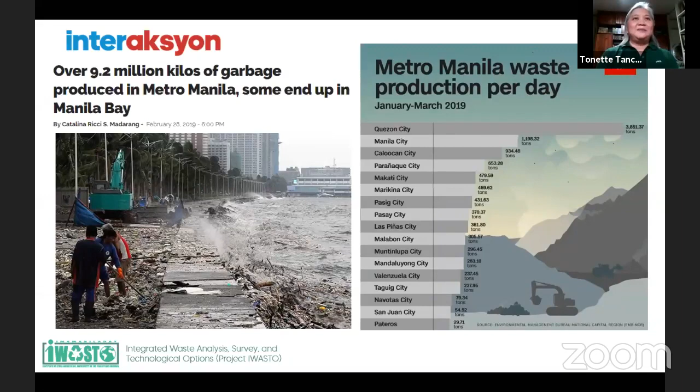Kung kailangan talaga nating gamitin, mag-reuse. And then pwede din namang mag-recover, yung may mga let's say nutrients sa mga nabubulok na bagay, sa biodegradable component, pwede nating ma-recover ang nutrients at pwede pang magamit, instead na tinatapon na lang.

Pwede ring mag-recycle, and then yung sa disposal part na is thermal treatment with energy recovery, for example incineration. And then final, kung wala na talagang ibang mapupuntahan, o para sa mga residual waste na wala nang mapapaggamitan, yun lang sana ang napupunta sa landfill.

Ang training natin ngayon ay tungkol sa paano natin mare-recover ang nutrients sa biodegradable component, na yun yung ipapaliwanag ng ating mga trainers maya-maya.

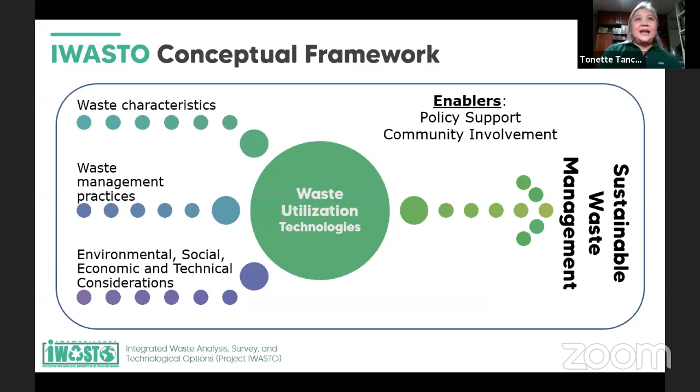Yung objectives, hindi ko babasahin literally lahat, pero ang target area namin, because this is for the rehabilitation of Manila Bay, yung part ng watershed dito sa Manila Bay watershed, specifically mga Pasig, Navotas, Malabon, Marilao, Malinta, Obando. Pero of course, kapag nag-training kami ganito, we invite everyone kasi applicable naman ito sa lahat, at sana mag-benefit din, marami namang lugar na pwede pa itong magamit.

Kailangan nating malaman yung to evaluate waste management practices, at ma-utilize ang to recommend appropriate waste utilization technologies, at mapag-aralan ano-ano bang facilities ang available, like may MRF ba, nasaan sila, anong mga material ang kinukuha nila, kasi malaking bagay din ito para mag-guide ang mga tao kung saan magdadala ng kanilang mga basura na hindi naman kailangang itapon, baka may pwede pang paggamitan.

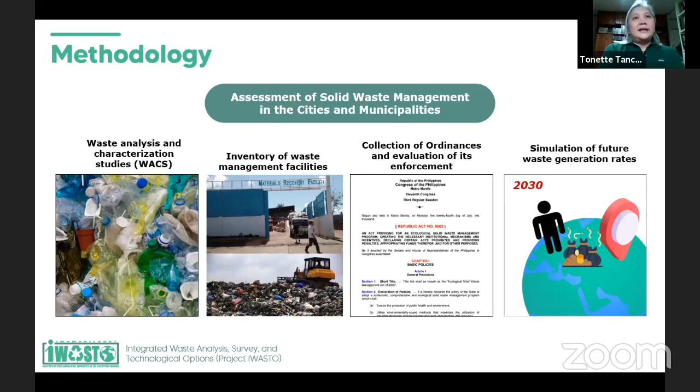Setting up the appropriate waste utilization technology - we are still looking for a partner right now because of the pandemic, we can't go out much. But we'd really like to be contacting and networking with LGUs who are willing to have these technologies in their community, even on a very small scale, smaller than barangay level. We would like to use the technologies already developed by ITDI and DOST, and set them up in the community.

So that's why we're doing this training. Aside from sharing the technology and knowledge about it, another purpose mentioned by Roda earlier is to find interested partners. Right now we haven't established one yet, hopefully somewhere in Manila, discharging to Manila Bay, part of the Manila Bay watershed.

We'd also like to systematize our waste data that is being collected and have it available to the public. I think this is important, so the general public knows what's happening, the data about waste. And finally, policy recommendations so the technology can be used, and of course contributing to sustainable solid waste management.

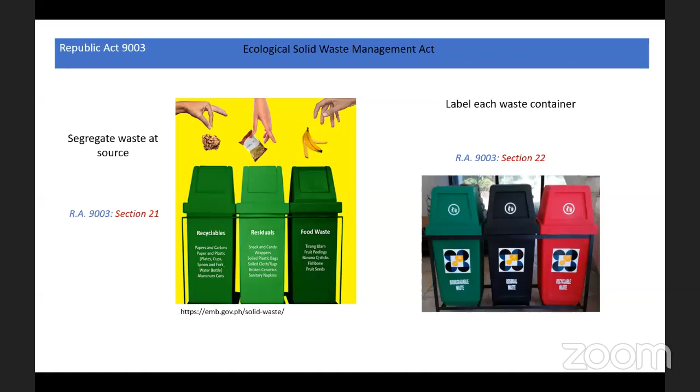There are four major waste categories. One is biodegradable, which should be processed into compost. Recyclable waste, which are normally collected in junk shops and recycling facilities. Special waste, which should be collected by accredited treatment plants. And residual waste, which should go to landfill.

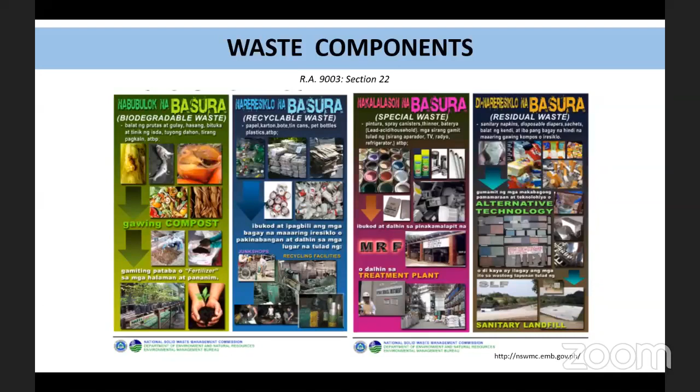If we are going to look at the waste characterization data, we can see that the Philippine solid waste is largely composed of biodegradable waste. So this has great potential for composting.

So here in ITDI, we develop various composting technologies to manage this biodegradable waste. One is the bioreactor composting technology, which can be used by local government units and establishments generating large volume of waste.

We also have the dual drum composter, which can be used by barangays, schools, universities, canteens, small farms, and institutions generating small amount of waste. And the other one, we have the household tumbling composter, which was basically designed for home composting. Allow me to give you the details of these composting technologies using our technology videos.

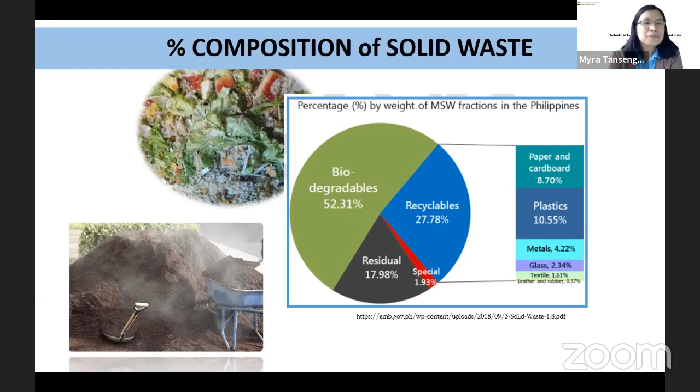Greetings from the Industrial Technology Development Institute, Department of Science and Technology. This presentation will provide information on the ITDI-DOST Bioreactor composting technology as an option for LGU to use in converting organic wastes into compost.

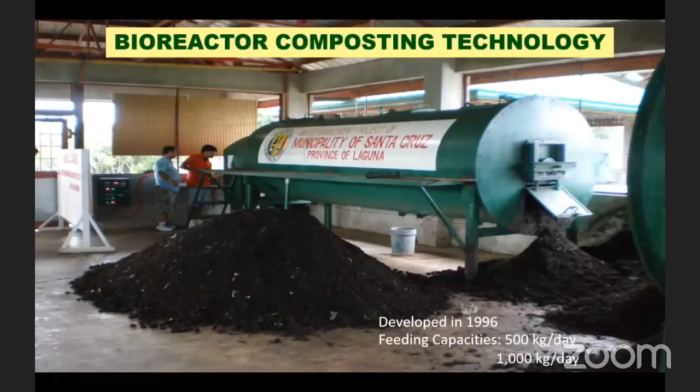The bioreactor composting technology was developed in 1996, with the aim to provide an alternative technology for management of municipal solid waste, specifically for the organic fraction of solid waste. The feeding capacities of the bioreactor are 500 kg per day or 1000 kg per day.

Through the paddle, materials slowly move into the opposite end where raw compost is discharged. The harvested raw composts are then transferred to the curing area for further degradation and maturation. Here is the composting process using the bioreactor technology.

First is material or feedstock preparation, where shredding of organic waste, weighing, and mixing of materials are done. Next is the in-vessel composting using the bioreactor. The composting operation using the bioreactor is continuous, meaning daily feeding of organic waste and daily unloading of raw compost.

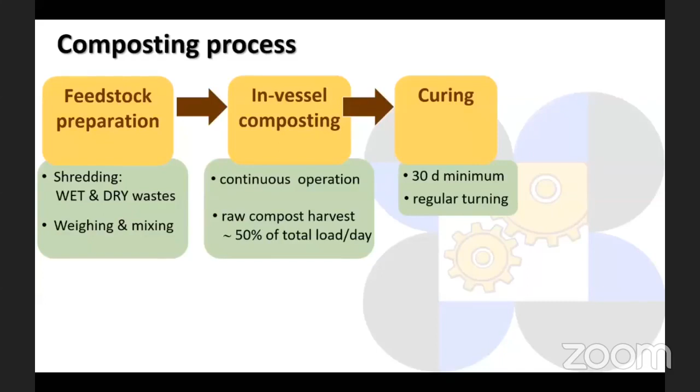Raw compost harvest is about 50% of the total load. This raw compost is then transferred to the curing area for further degradation and maturation for a minimum of 30 days. Curing piles should be regularly turned and temperature is also monitored. Finally, mature composts are then sieved and packed.

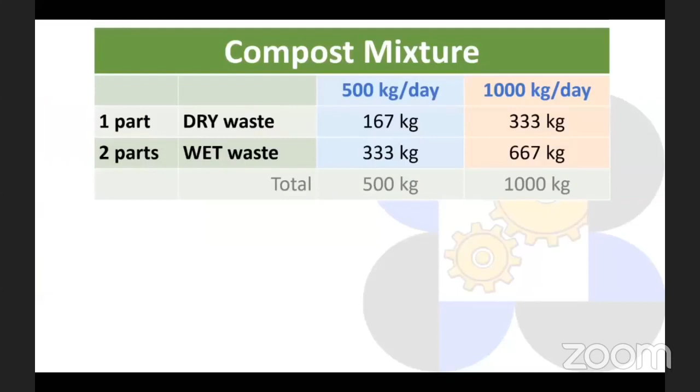Here's the recommended proportion of organic materials for composting: 1 part dry waste and 2 parts wet waste. Dry wastes or the browns serve as carbon source needed by decomposers or the microorganisms responsible for decomposition of organic wastes, while wet wastes or the greens serve as nitrogen source for decomposers. These materials are both needed for optimum composting activity.

So, for a 500 kg per day bioreactor capacity, you need a daily loading of about 170 kg of dry waste and about 330 kg of wet organic wastes. For a 1 ton per day capacity bioreactor, you will need a daily input of about 330 kg of dry wastes and about 670 kg of wet waste.

You can try this proportion initially, but you can also try 1:1, or 1 part dry waste and 1 part wet waste, depending on the type of waste materials you have.

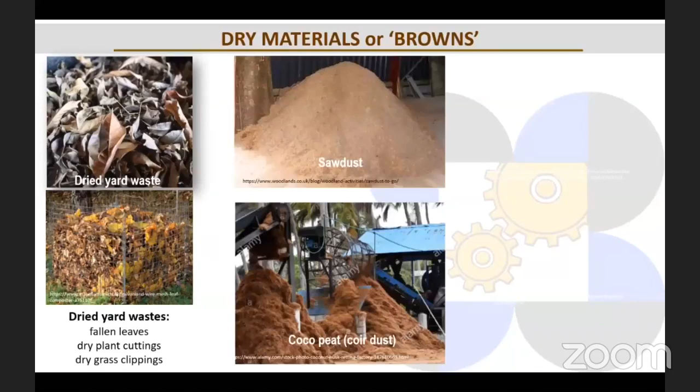Here are examples of dry materials or browns: dried yard waste such as fallen leaves, dry plant cuttings, or dry grass clippings, sawdust, coco peat or coir dust, and agricultural wastes such as rice straw, sugarcane bagasse, corn cobs, etc.

Wet wastes or greens include kitchen waste such as vegetable scraps, fruit peelings, and leftover food, market waste such as vegetable scraps, and food processing wastes. You can also use fresh garden wastes, as well as fresh agricultural or farm waste as wet wastes.

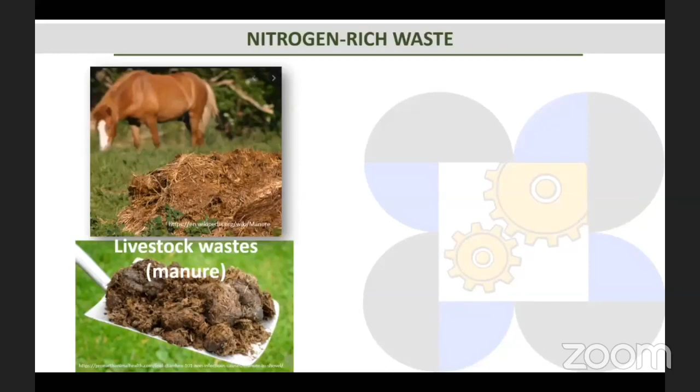If available, nitrogen-rich sources can be added in the wet materials. Nitrogen-rich wastes include livestock waste such as manure from poultry, piggery, horse, and dairy farms. This should be added in moderation in the composting mixture, about 10% of the total mixture is recommended if available. Also high in nitrogen level are fish wastes, and green materials such as fresh grass clippings, legumes cuttings, weeds, etc.

Composting materials, that is, wet and dry wastes, should be shredded prior to loading into the composting unit. Small particle size of waste materials will allow faster decomposition during composting.

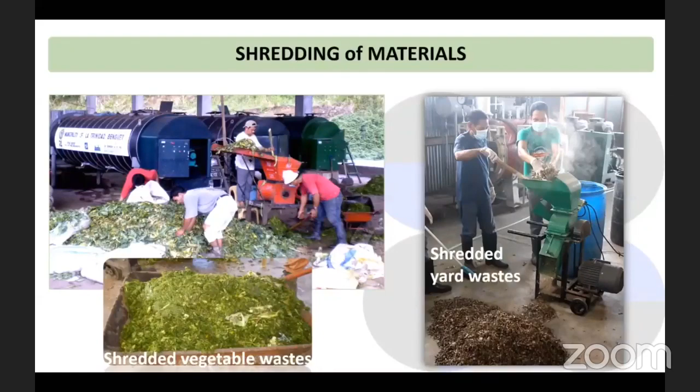Once all the raw materials for composting are prepared, weigh and mix the shredded wet and dry wastes. The moisture content of the initial mixture should be 50 to 60%. This is considered to achieve the optimum moisture content for compost decomposers.

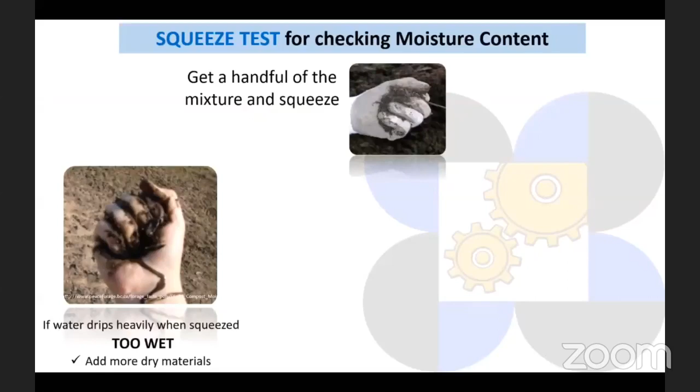Moisture content of the initial mixture can be determined through a simple method called squeeze test. First, get a handful of the mixture, then squeeze. If while squeezing, water drips heavily, it means your mixture is too wet, or the moisture content is more than 60%. You can resolve this by adding more dry materials to your mixture.

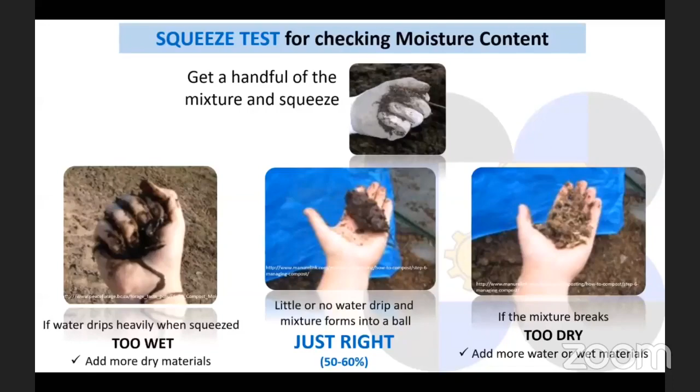If little amount to almost no water drips when you squeeze, open your hand. If the mixture in your hand forms or clumps into a ball and retains that shape, then the moisture content is just right—you have achieved 50 to 60% moisture content. However, if the mixture crumbles or breaks when you open your hand, it means the mixture is too dry. Add more water or wet materials to the mixture until you achieve the right moisture level.

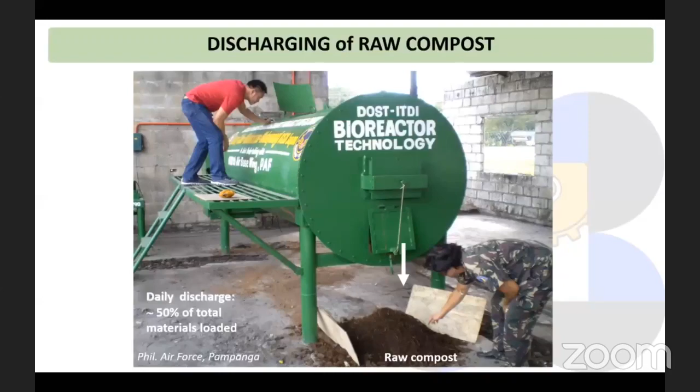After preparing the right mix, the materials are then loaded into the bioreactor at the top feed port. Loading is staggered to avoid choking the unit. Raw compost is slowly discharged at the opposite end port. In one day, you can harvest about 50% of the total materials loaded.

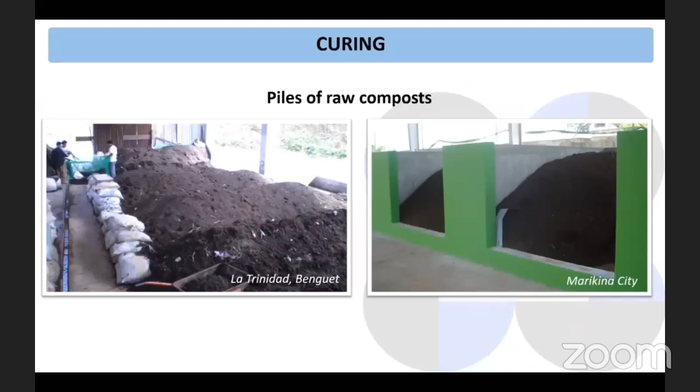Harvested raw composts are transferred to the curing area. Remaining organic matter are further degraded during the curing phase, therefore an increase in temperature can be observed during curing due to microbial activity. Regular turning of piles, and monitoring of temperature and moisture should be done during the curing stage.

After the curing stage, the final product is then sieved and packed. Label the compost and store in a dry, covered area. Compost is mature and ready for use when the temperature in the pile has dropped to 33 to 35 degrees centigrade, or approximately ambient temperature.

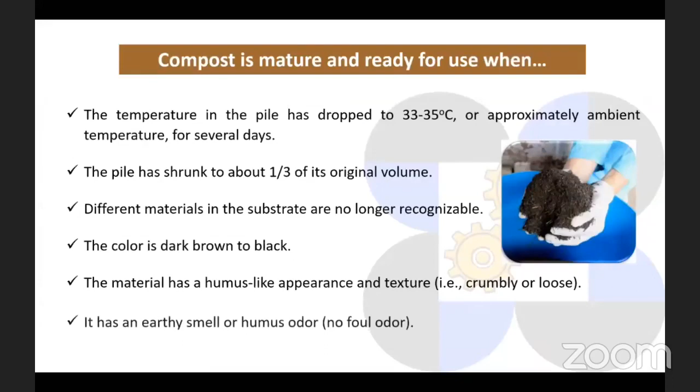The pile has shrunk to about 1/3 of its original volume. Different materials in the substrate or mixture are no longer recognizable. The color is dark brown to black. The material has a humus-like appearance and texture—it should be crumbly or loose. It has an earthy smell or humus odor, and it should have no foul odor.

The composting product may be applied in ornamental plants, backyard gardening, landscaping and greening programs. Take note that the quality of compost products depends on the materials used and observance of critical parameters of the composting process. It should undergo appropriate testing and analysis before it can be used for plants intended for consumption.

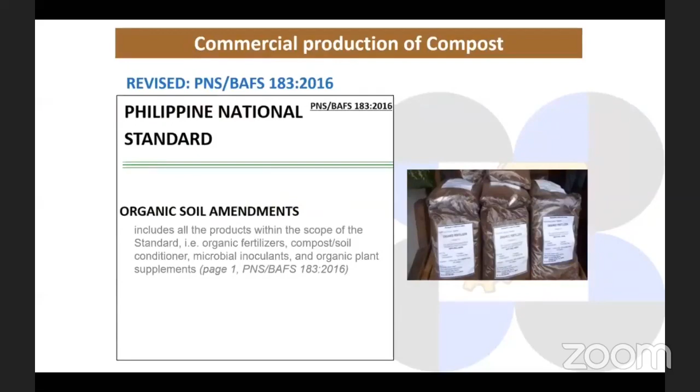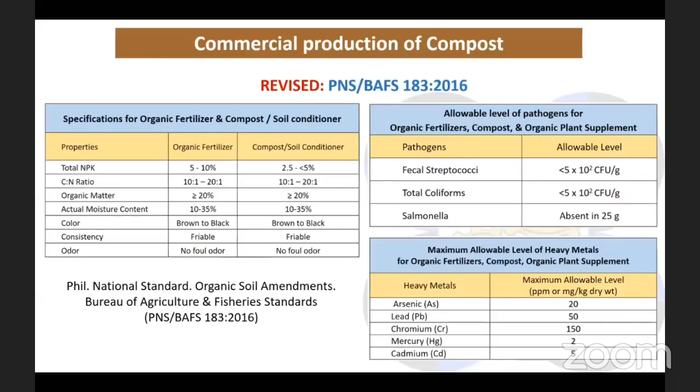For commercial production of compost, please check the Philippine National Standards for Organic Soil Amendments. This PNS on soil amendments shows that compost for commercial production should be analyzed for basic property parameters, pathogens, and heavy metals, and the product should meet the allowable levels. The PNS for organic soil amendments can be downloaded online.

Here are the needed materials during composting operation that you can consider in budget planning. Aside from the composting machine, you will also need a shredder, common garden tools and supplies, and very importantly, PPE or personal protective equipment. You will also need documentation supplies and personal hygiene supplies.

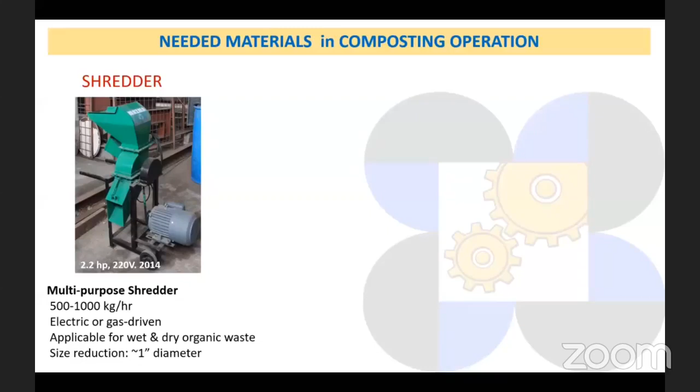A mechanized shredder is needed to cut the waste materials into smaller pieces to help hasten the composting process. A multi-purpose shredder applicable for wet and dry organic wastes is recommended. A mechanical or digital weighing scale can be used for weighing the waste materials to be processed for composting. A dial thermometer is used in composting to monitor the temperature of the mixture or pile. Here are other needed materials and supplies.

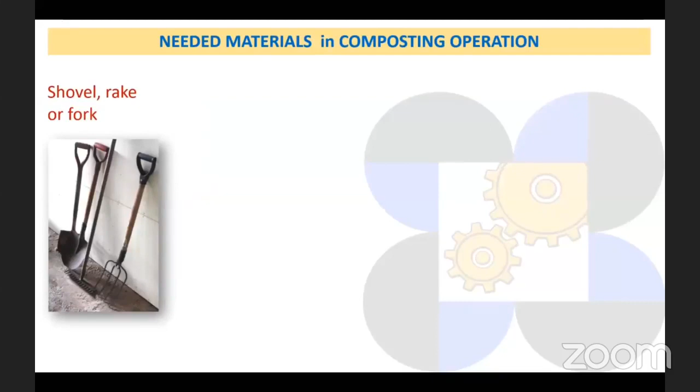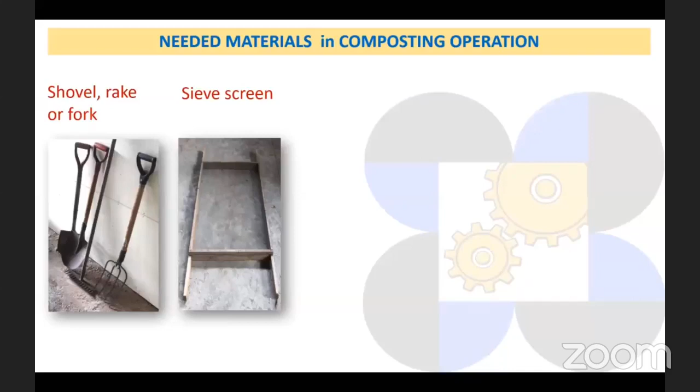A shovel, rake or fork will be used for mixing initial composting materials, and for turning the compost pile during the curing stage. A compost sieve is used for sifting out big, undecomposed particles from the final product before packing and storage. Pails or drum containers are used for waste collection and storage.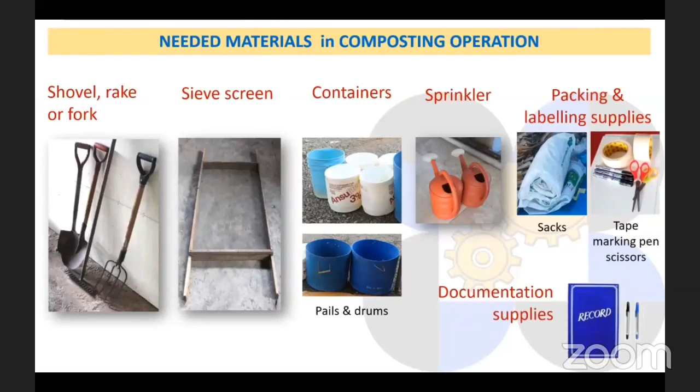Water sprinklers are used for applying water into the mixture or pile to maintain appropriate moisture content. Sacks are used for storing the final product, along with labeling supplies such as tape, scissors, and marking pen. Documentation supplies such as a record book and pen are used for recording all details of composting activities.

Personal protective equipment, or PPEs, needed during composting operation include gloves, masks, goggles and boots, to minimize exposure to potential health and safety hazards. Workers should also wear proper working clothes, that is, long sleeves and long pants, or alternatively, a working shirt with arm cloth in place of long sleeves.

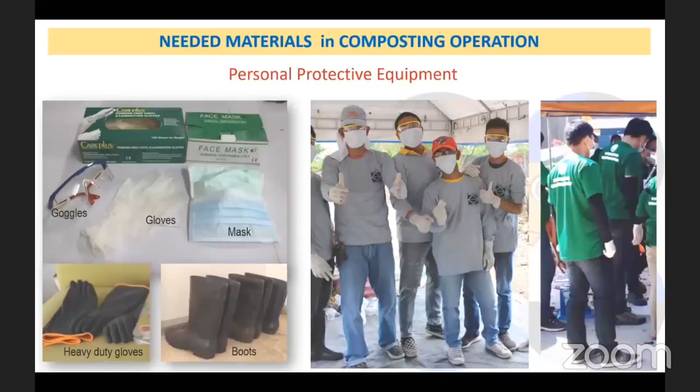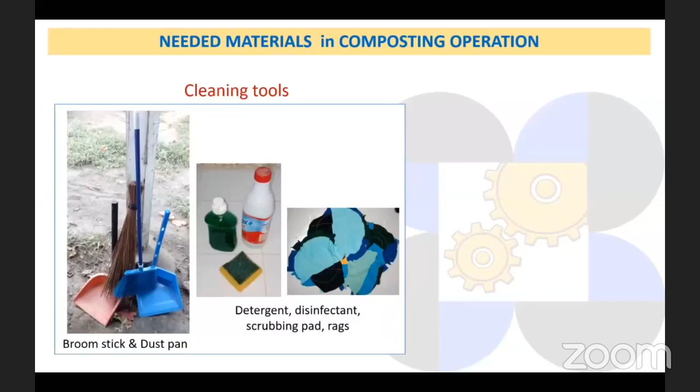Cleaning tools are needed for regular cleaning and maintenance of the composting facility and used tools and materials, to keep the composting tools and area clean. This may include broomstick and dustpan, rags, detergent, disinfectant, and scrubbing pad. Finally, personal hygiene supplies such as soap, tissue and alcohol should be available for the workers.

When choosing a location and setting up the composting facility, here are a few important considerations. The composting facility should be located away from residential areas. The distance from human settlements and source of drinking water or wells from the composting area shall not be within 5 meters. The composting facility for a bioreactor unit should have at least 120 square meters, with enough space for workers to move around during composting operation.

The area should be secured and covered to protect the equipment and tools, preferably with concrete floor and not prone to flooding. There must also be electric and water supply in the facility. The bioreactor requires a 220-volt outlet. For manpower, at least 2 to 3 workers can be designated to operate the bioreactor composting technology.

Here is a recommended layout for the composting facility. The process flow should be carefully considered, from the entry point of waste materials up to the storage of the end product, for better workflow and personnel movement within the area. The facility should have the following parts: a material or feedstock preparation area, where shredding, weighing and mixing of organic wastes is done.

An in-vessel composting area, where the composting unit is loaded with the prepared biodegradable wastes. A curing area, where the harvested raw compost is piled for further degradation and maturation. A screening and packing area, where the mature compost is sieved and packed, and finally, the product storage and exhibit area. In addition, a washing area should be put in place for water supply and regular cleaning.

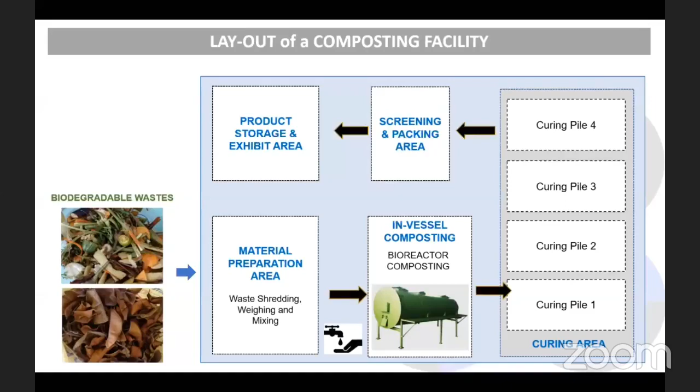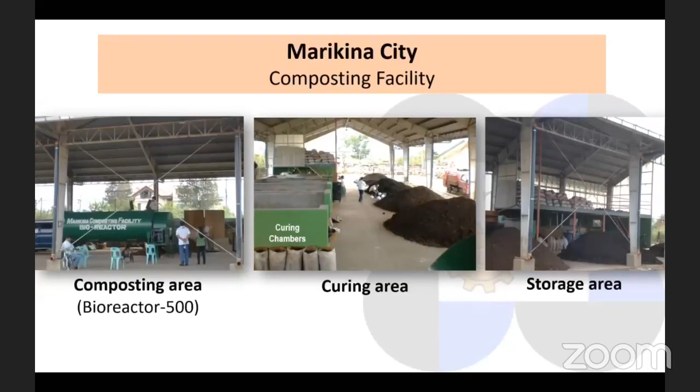Here is the composting facility in Marikina City. Shown here are their composting area with a 500 kg per day capacity bioreactor, the curing area with cubicles and ordinary piles, and the storage area.

Here's the list of bioreactor adopters nationwide. As of January 2020, we have a total of 121 adopters, the majority of which are local government units. Some adopters are food processing industries and private farms.

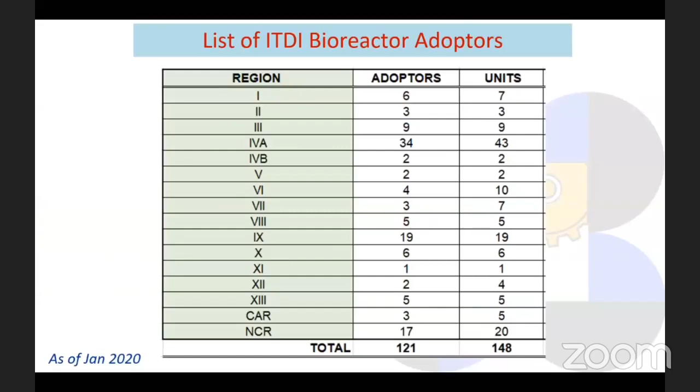We have 4 licensed accredited fabricators of bioreactor composting technology: Lamaco in Bacoor, Cavite; Mariñas Technologies Incorporated in Pila, Laguna; Pimentel Creative Builders and General Services in Zamboanga del Sur; and Bestmark Agro-Industrial Enterprises in Santa Barbara, Pangasinan.

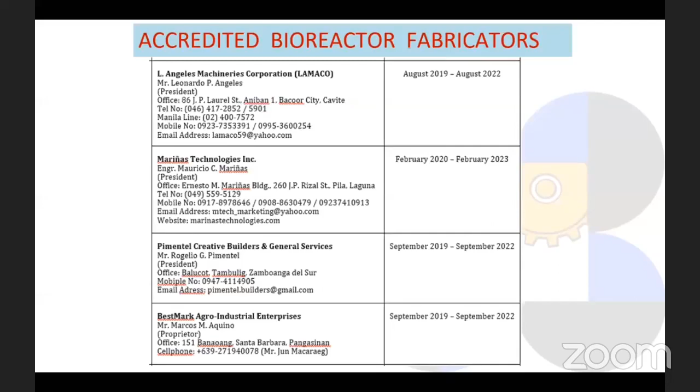The estimated cost for fabrication of a bioreactor unit: the 500 kg per day capacity bioreactor is about 625,000 pesos in Luzon and about 645,000 pesos in Visayas and Mindanao. The 1 ton per day capacity bioreactor is about 1.2 million pesos in Luzon and 1.22 million pesos in Visayas and Mindanao. Please contact our accredited fabricators to get an updated cost.

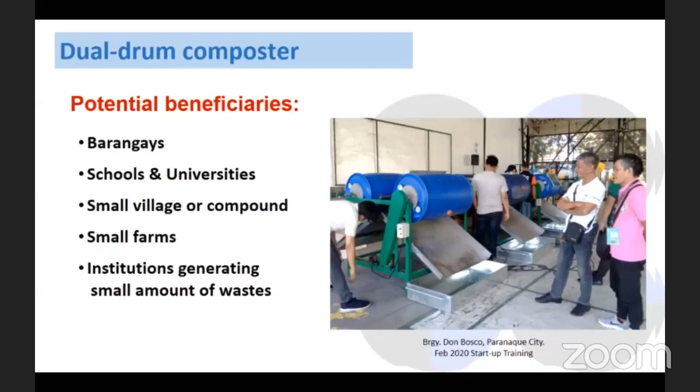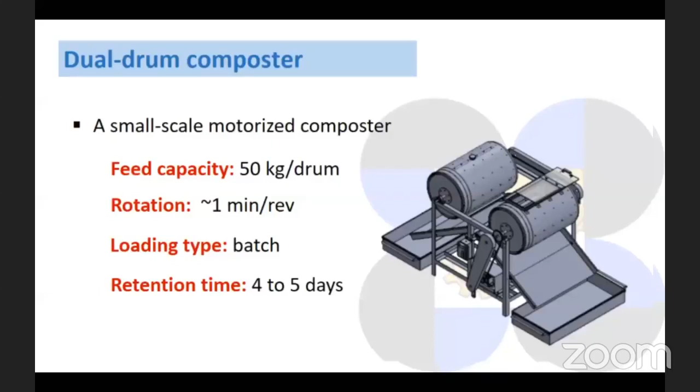The unit is a small-scale motorized composter with a feed capacity of 50 kg per drum. The drum rotation is about 1 minute per revolution, operated by a 1/4 horsepower motor. Composting operation is batch type, running for 4 to 5 days.

Just like the bioreactor technology, composting using the dual-drum technology is initiated with a startup operation for inoculant propagation. The startup phase, or inoculant propagation, takes around 2 days. The resulting product can then be used as inoculant for the regular composting process. If the adopter has an existing compost pile, the startup phase can be skipped, and the adopter can utilize the compost pile as inoculant for regular composting.

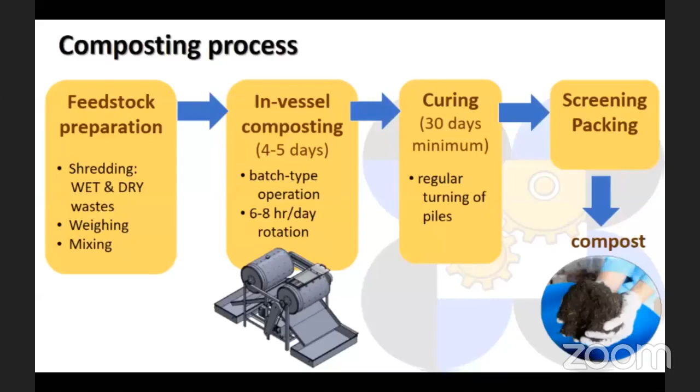The regular composting process is almost the same as in the bioreactor, which includes material preparation, in-vessel composting using the drum composter, curing, and screening and packing. The main difference is that the operation in the dual drum composter is batch type. The drum is rotated for 6 to 8 hours per day, and the mixture is unloaded after 4 to 5 days. As in the bioreactor technology, wet and dry organic wastes are used as composting materials.

Here is the recommended mixture for a 50 kg drum. You will need 10 kg of dry or brown waste, 20 kg of wet or green waste, and 20 kg of the inoculant, which can be obtained after the startup operation, or from an existing compost pile. Dried yard waste may include fallen leaves, dry plant cuttings, or dry grass clippings, sawdust, coco peat or coir dust, and agricultural wastes, such as rice straw, sugarcane bagasse, corn cobs, etc.

Wet wastes or greens may include kitchen waste such as vegetable scrap, fruit peelings, and leftover food. Market waste such as vegetable and fruit scraps. Food processing wastes. Fresh garden wastes such as fresh grass clippings and plant cuttings. And fresh agricultural or farm waste. Nitrogen-rich wastes such as livestock manure and fish wastes can be added in wet waste, but in moderation.

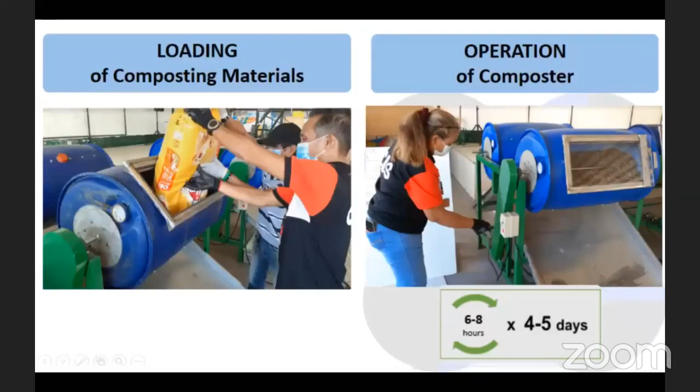All composting materials are shredded prior to loading into the composter. Once the shredded materials are loaded, run the composter for 6 to 8 hours daily for 4 to 5 days. Check the moisture content of the initial mixture after about 1 hour of running using the squeeze test method. Checking of moisture content should be done daily and adjusted as needed.

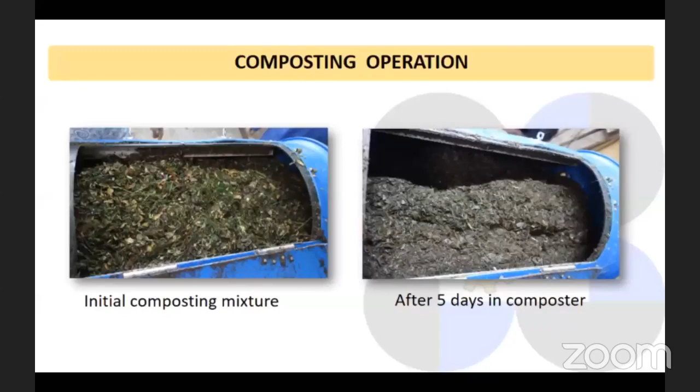This shows the composting mixture before and after the composter operation. After 5 days of operation, the materials are partially degraded, and these are transferred to the curing area. So after 4 to 5 days, the compost mixture is then unloaded and raw compost is transferred to the curing area for further degradation and maturation.

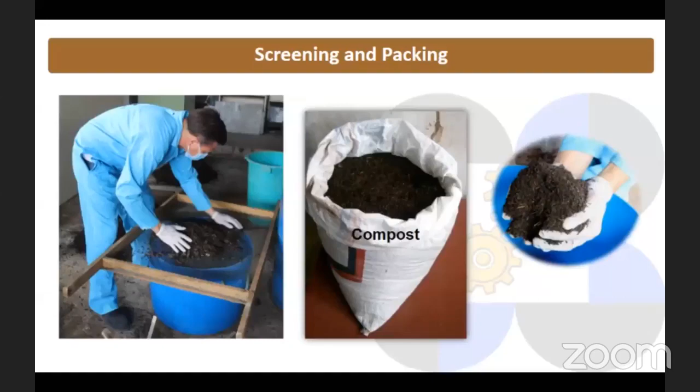Curing phase may take 30 to 40 days. Mature compost is then sieved to remove materials that have not fully decomposed. Large or coarse particles can be shredded and mixed with the new batch of materials for loading to the composter. Pack and label the compost, then store in a dry and covered area.

Site requirement for the dual drum composter is also the same as in the bioreactor technology, except that the minimum covered area required is 50 square meters. Also needed are water and electric supplies, and at least 2 workers.

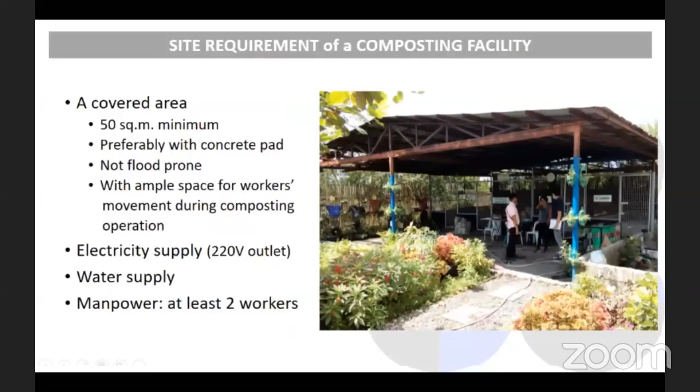Recommended layout for the composting facility is also the same as in the bioreactor technology, considering the different stages of the composting process. The usual composting tools and equipment are also needed during the operation of the dual drum composter. Basically, these consist of personal protective equipment, shredding machine, weighing scale, common composting tools, cleaning tools, packing and labeling supplies, and personal hygiene supplies.

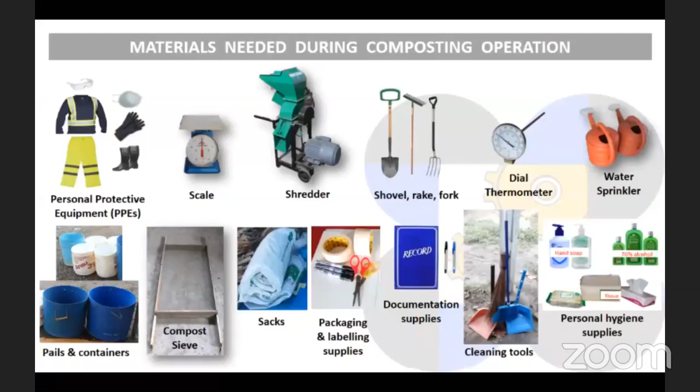Accreditation of fabricators for the dual drum composter started in 2019. So far, we have the following 3 accredited fabricators: Lamaco in Bacoor, Cavite; Suki Trading Corporation in Lapu-Lapu City, Cebu; and Bestmark Agro-Industrial Enterprises in Santa Barbara, Pangasinan.

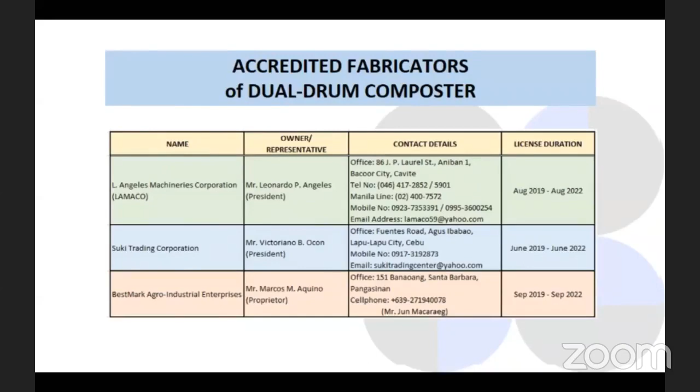Here's the list of adopters of the dual drum composter. From 2018 to January 2020, we have a total of 38 adopters. Majority of the beneficiaries are barangays.

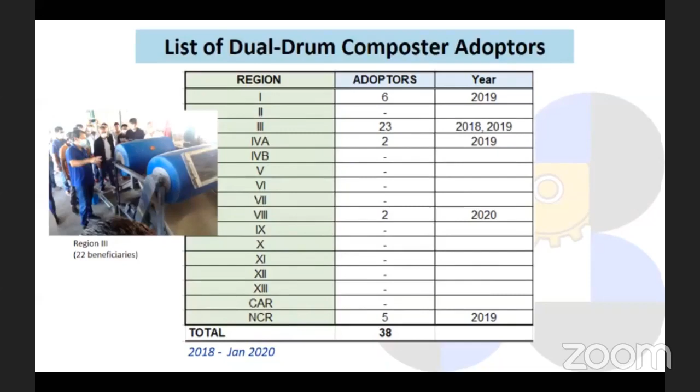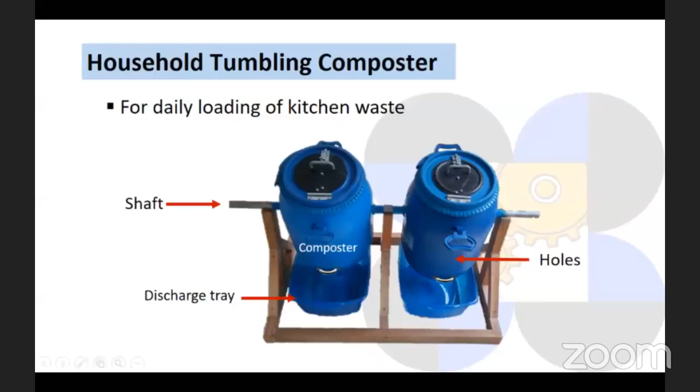The next composting technology is applicable for home composting. The tumbling composter was designed for daily loading of household-generated kitchen waste. The unit is composed of 2 30-liter drums as composters. The shaft holds the 2 drums and allows tumbling of the drum composter. The drum body is lined with holes for aeration. And the bottom trays are used for collection of harvested product.

Aside from converting household kitchen waste into compost, this household composter also allows family members to segregate their own waste, which complies with RA 9003, the Ecological Solid Waste Management Act, emphasizing waste segregation at source and composting of bio-waste. Since the organic waste is kept in a closed container, pests such as rats, cockroaches, and flies are avoided. Moreover, it also prevents disturbance by house pets like cats and dogs.

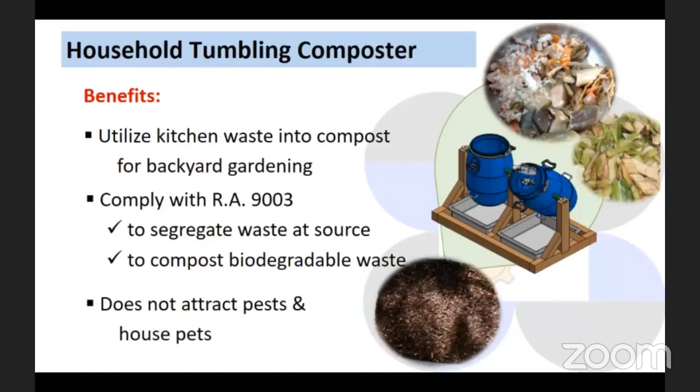Materials for household composting basically consist of household-generated kitchen waste. This may include leftover food, vegetable scraps, and fruit peelings. Dry materials are added as a carbon source for decomposers and to absorb the high moisture content of kitchen waste. Dry waste may include dried yard waste, sawdust, or coco coir dust.

It is recommended to always chop the kitchen wastes and dry materials to speed up the decomposition process in the composter. The procedure is simple: fresh kitchen waste is daily loaded in the composter drum. Dry waste is added on top, then the drum is tumbled 8 to 10 times to mix the drum content.

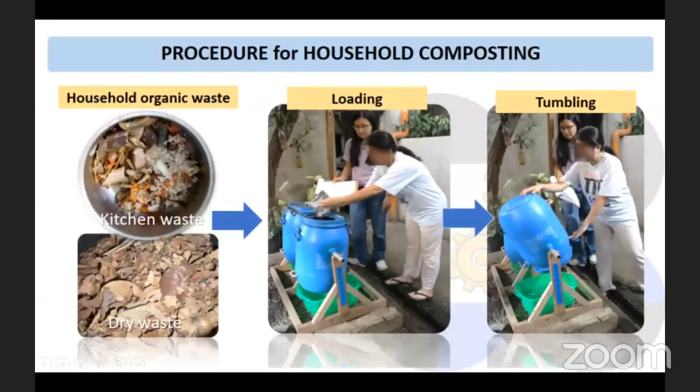Once the first drum is full, the other drum is then used for loading of daily generated household kitchen waste. The content of one drum is unloaded when both drums are full. To unload, the drum composter is turned upside down, and the materials are collected in the discharge tray.

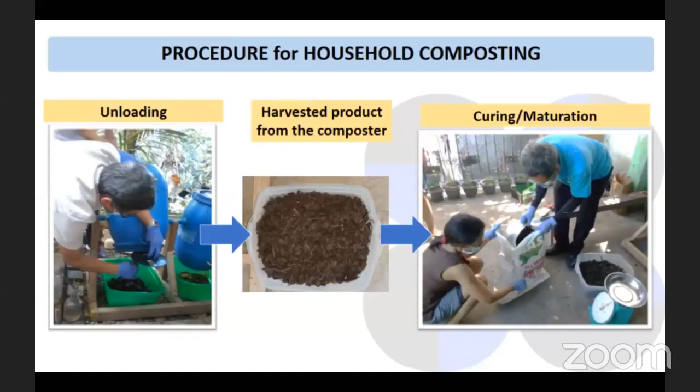Harvested raw compost appears brownish to dark, and these are kept in sacks for further maturation for at least 2 to 4 weeks. Mature compost is then screened. The fine compost product appears dark brown to black, mixed with garden soil. The product can be applied in backyard gardening. Coarse materials after sieving can be used as dry materials for daily loading of household kitchen waste.

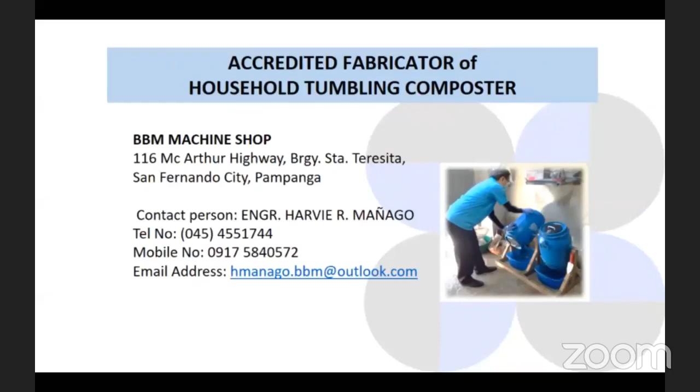This year, we started the accreditation of fabricators of household tumbling composters. So far, we have the BBM machine shop in San Fernando, Pampanga. There are other fabricators with ongoing processing of documents.

So those are the ITDI-DOST composting technologies for management of biodegradable wastes. Please feel free to send us a message if you have inquiries about these technologies. Good day everyone.

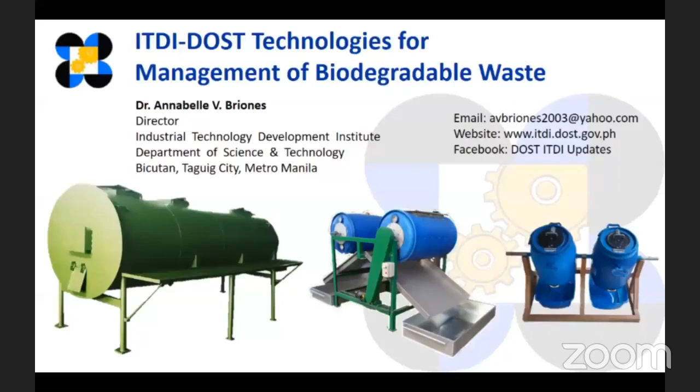That was the presentation prepared by Dr. Myra Tansengco for the bioreactor, dual drum, and household tumbling composters.

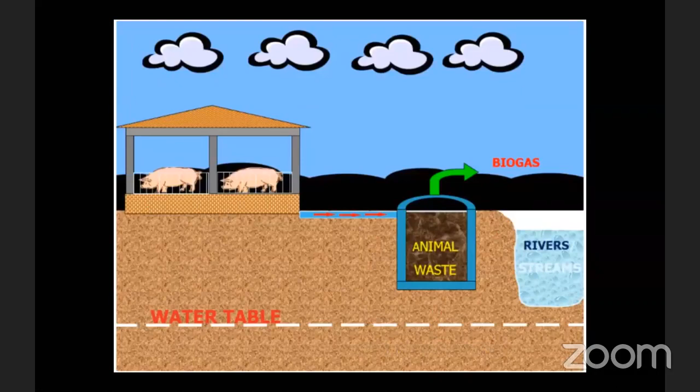Uncontrolled dumping of municipal waste contributes to air, land and water pollution. Waste materials produce toxic gases, methane and carbon dioxide, which contribute to global warming. Wastewater from the waste leaches out to the ground and contributes to groundwater contamination. In addition, leachates run off to nearby bodies of water such as rivers and lakes.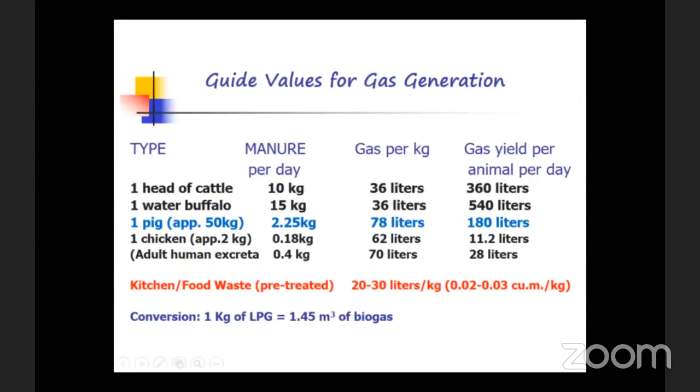Most notably is pig manure, which produces 78 liters of gas per kilogram of waste. Pre-treated kitchen waste can produce about 20 to 30 liters of gas per kilogram of waste. 1 kilogram of LPG is equivalent to 1.45 cubic meters of biogas.

The flow diagram of the biomethanation of kitchen or food waste was based on our research and development. Kitchen and food waste goes through size reduction through shredding. This will enable the bacteria to consume the waste efficiently and effectively.

After shredding, the waste will be mixed with Trichoderma harzianum and retained for 3 days. Trichoderma is a fungi degrader and degrades the fibrous content of the waste.

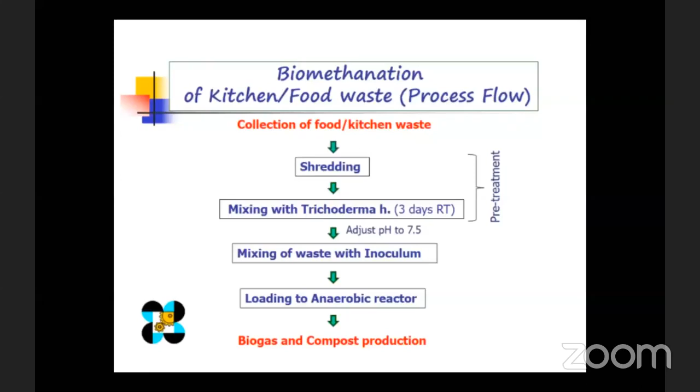After mixing with Trichoderma for 3 days, the substrate is then mixed with an inoculum. The inoculum is an active anaerobic bacterial sludge collected from an operational biogas digester. The mixture is loaded to the anaerobic reactor or biogas digester. After some time, the biogas digester will produce biogas and compost.

There are certain factors that should be understood and noted in biogas digestion. pH is an important factor since the bacteria inside the biogas digester live in a neutral pH. If the pH of the digester is pH 5, this means that most of the bacteria are dead.

Biogas production increases when the temperature of the digester is from 40 to 55 degrees Celsius. The minimum retention time of the digester is 20 days. Retention time is the needed time for the bacteria to consume the waste and increase their population.

The biogas digester should not be loaded with chemicals harmful to the bacteria, such as soap, chlorine and acids. Mixing of the substrate inside the digester increases biogas production and is essential when dealing with food or kitchen waste.

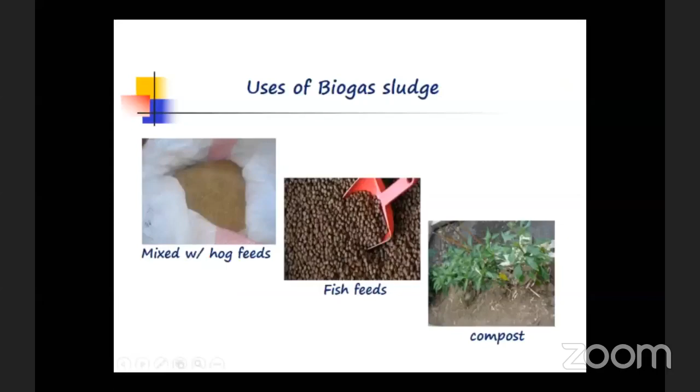Generally, biogas can be used for cooking, lighting, and fuel for water pumps, broiler heaters, and generator sets. Biogas sludge can be dried and mixed with hog feeds, fish feeds, and can be used as compost for plants. The 200 liters capacity portable biogas digester comprises plastic blue drums.

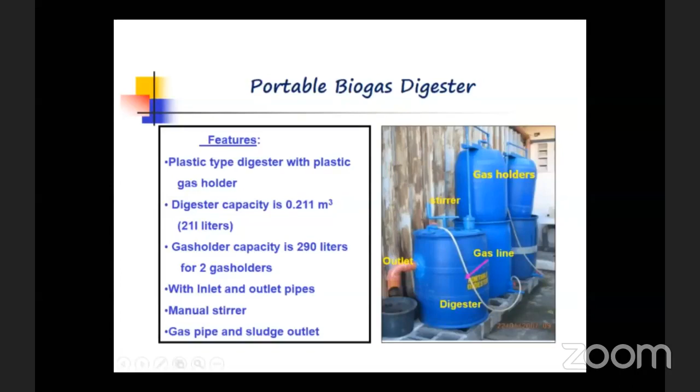1 drum is used as the digester and 2 drums comprise 1 gas holder. The digester capacity is about 211 liters while the 2 gas holders have a capacity of 290 liters. The 2 gas holders, when filled with biogas at full capacity, can be used in a biogas stove for 1 hour. One set of portable biogas digester comprises 1 digester and 2 gas holders.

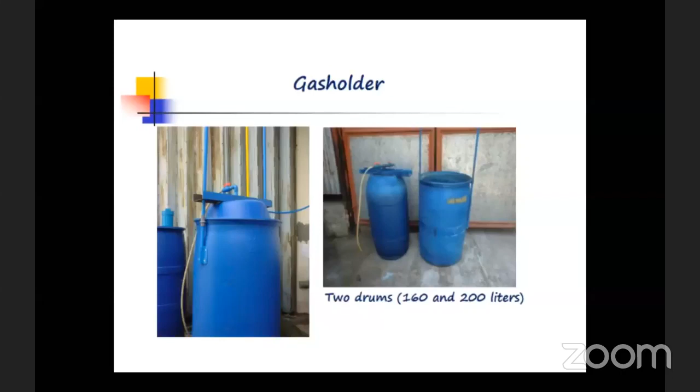The portable biogas gas holder comprises 2 drums, 200 and 160 liter drums. The 160-liter drum is placed inside the 200-liter drum. The gas holder will be loaded with water at the brim.

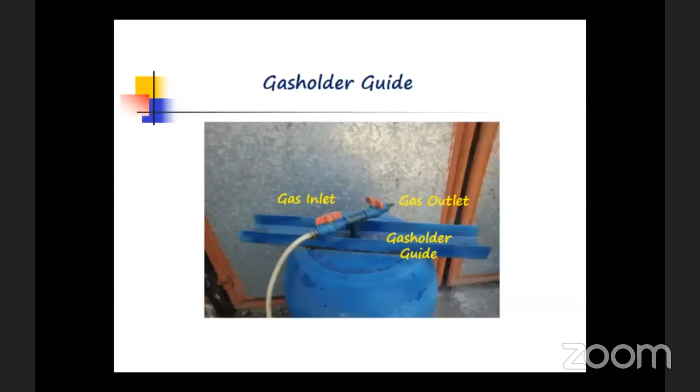The picture shows the gas holder guide. The gas holder guide comprises a gas inlet and outlet, and a metal C-channel. The C-channel has holes at each end to guide the 160-liter drum from moving upwards and downwards when gas is being produced and utilized. In addition, the C-channel adds pressure to the biogas when utilized.

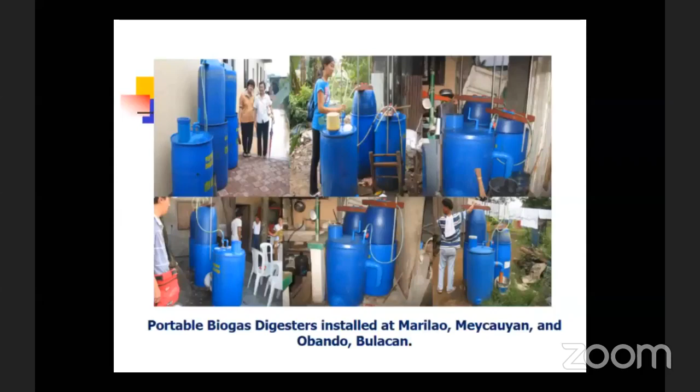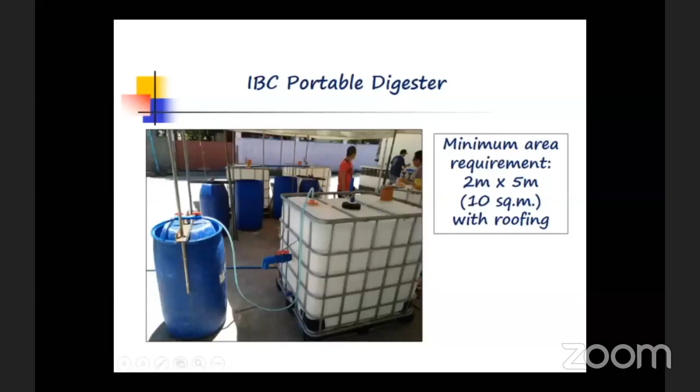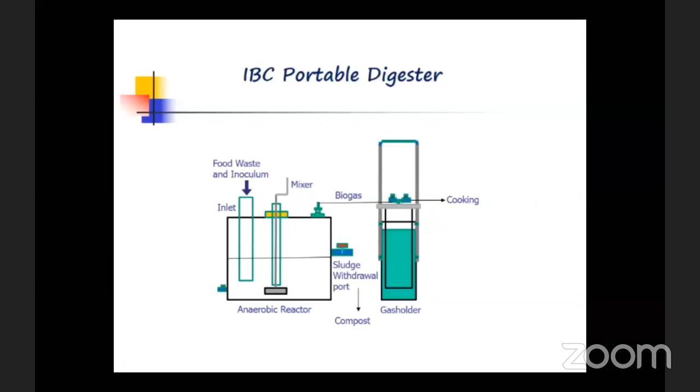The IBC portable digester comprises an inlet, a mixer, a gas outlet, and a sludge withdrawal port. Sludge withdrawn from the withdrawal port can be dried and used as compost. The gas holder is the same as the 200-liter portable digester.

The table shows the daily loading rate of the 200-liter and the 1,000-liter capacity portable biogas digester. In addition, the table shows the needed inputs for the startup operation of the two types of portable biogas digester.

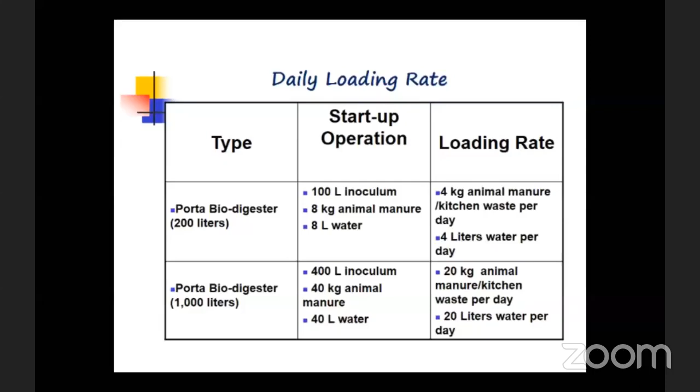In the table, 4 kilograms of manure or kitchen waste and 4 liters of water can be loaded daily to the 200-liter capacity digester, while in the 1,000-liter capacity, 20 kilograms manure or kitchen waste and 20 liters water can be loaded daily. The estimated cost of the ITDI portable biogas digesters is 20,000 pesos for the 200-liter capacity digester and 32,000 pesos for the 1,000-liter capacity digester.

The estimated cost includes a technology fee of 11,000 pesos. The possible accredited fabricators with a Memorandum of Agreement or MOA are BBM Enterprises from San Fernando, Pampanga, LAMACO from Bacoor, Cavite, and Keba Engineering from Bulacan.

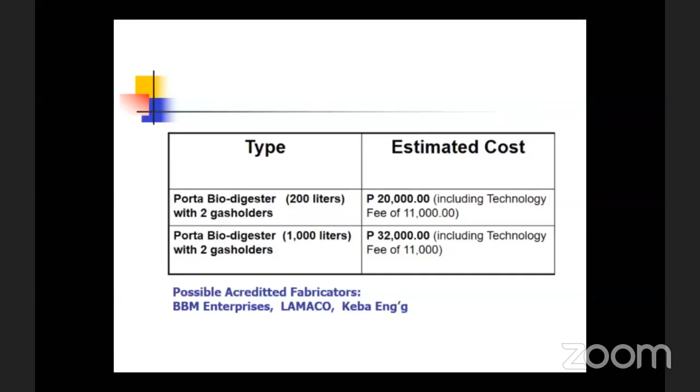If you want to avail of the ITDI portable biogas digesters, please contact our director, Dr. Annabelle Briones. Thank you for watching and God bless us all.